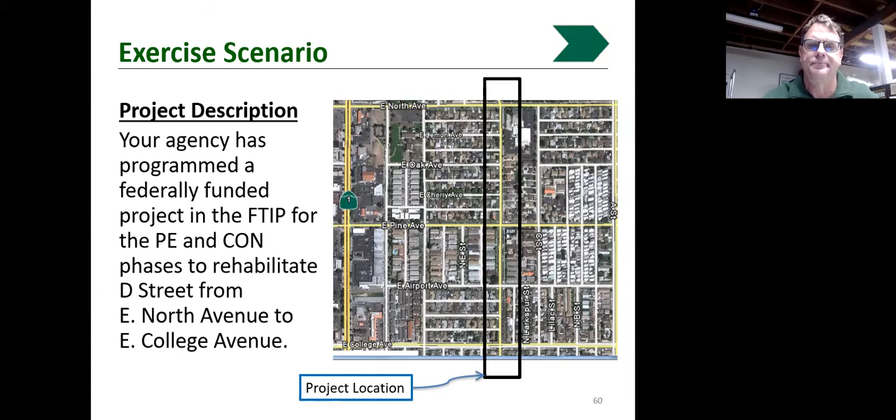So in terms of the RFA package, we're doing PE. This is what we expect you to deliver to the Caltrans district engineer.

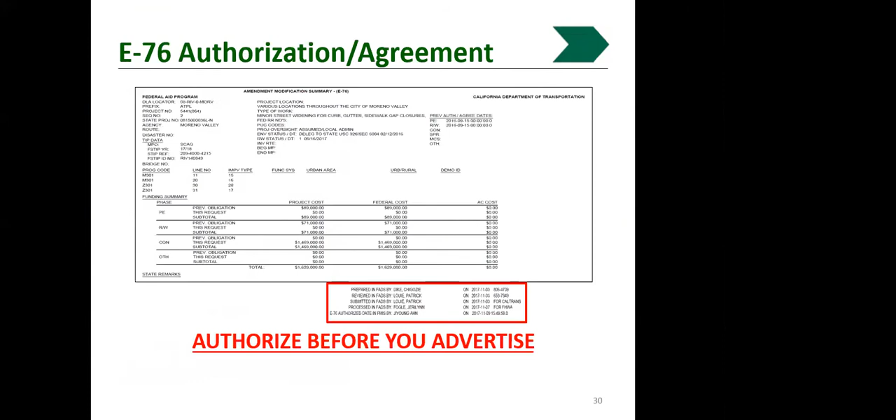Oops, what happened? I'm sorry people, it did it again. When you have a keyboard, Peter, I have a trick for this. If you right click on the PowerPoint, you can select the slide you'd like to jump to. Thank you. Yeah, it's just, I got crazy fingers and the keys I want to hit are right next to each other, and I just hit one too high.

Okay, so assuming this federally funded road rehab project is programmed in the FTIP for both PE and construction, you're going to provide documents for the PE, providing the following documents in the package.

You have a field review, FTIP, and a classification map. We're going to complete the request for authorization, the LAPM 3A, in this case as a group, but basically led by me. I will pause.

So for the field review form, standard information, one of the key things is ensuring there's consistency. I emphasize this, consistency in terms of the project description and limits, that these meet everything in terms of where it's defined in the FTIP versus the field review. Because our requirement prior to the field review is the PES, the environmental documentation you fill out before, and that document is required to have the FTIP description in it. So the FTIP description should carry forward through all this documentation to ensure we are authorizing what was programmed. So I emphasize consistency between these documents regarding this work.

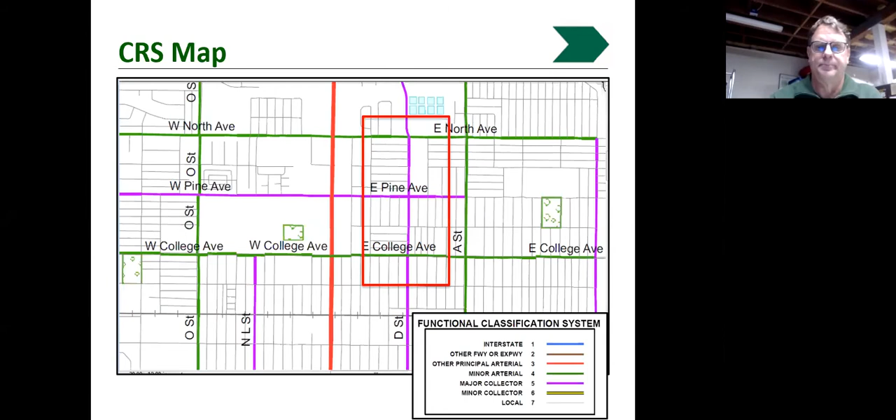And so it goes to major collector. Is it on the federal aid system? Obviously, the field review defines it as being on the federal aid system. And some areas get involved with, is this a PoDI? Well, no, it's not. The Caltrans encroachment - is this any way, shape, or form touching a state facility? No. And is it state only funded? No, we're using federal funds.

So cost estimate breakdown for this project - these are things you would develop to have an estimate. In this case, you're showing that you're going to be using federal funds for both environmental, design, and construction engineering. You have an estimate. These things are updated periodically. Early in the process, these are going to be really rough numbers. They're not going to be exact, but they should help tie into what's programmed in the FTIP. That's one of the key things here - these numbers should be very close to what's programmed in the FTIP.

So project administration - the agency is going to be doing the design and environmental themselves. Construction engineering, yes. Construction, of course, is going to be contracted out, so it's consultant - that's what it really means. And then, of course, the maintenance of the project is the agency's.

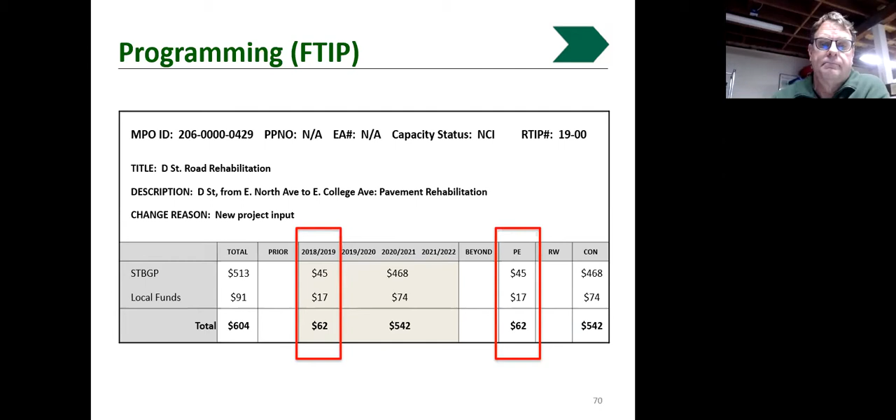So we're going to now start going through the process of filling out this form. The date is just a pull-down calendar. Federal project number - that will be a number supplied to you from the Caltrans district area engineer, the DLA, so they'll give you a federal project number. The alpha prefix ties in with the funding code. We mentioned earlier that we have STP funds on this, a block grant, so we get an STPL prefix.

The first 4-digit number is what we call a loco. Every agency has a loco - it's just unique for your agency. The parens number, in this case the 86, is just a numerical sequence of projects that have been developed for that agency. We have a system called LP2000, and that's how our numbers are generated. So if we came through with the next project, it would generate an 87. That's all, but every project has a unique federal project number.

So the agency, city or county, put your information. Caltrans district, it's a pull-down menu - in this case, we chose District 5. And a congressional district - when you select Caltrans District 5, the congressional districts are restricted to congressional districts within that Caltrans district. And the CRS maps can help you identify exactly which congressional district.

And then what we do is we add 12 months to those dates to allow for unforeseen conditions that happen - you know, there's a delay or something like that that occurs.

Project end date for this project - these are kind of estimates. In this case, we had a construction federal fiscal year that was 2 years out. We estimated, granted these are a little bit off of today's dates, but we estimated the advertisement date was going to be March of 2021. So the project end date would be 3/11/22. There's a pull-down menu - you put in 3/11, and it automatically adds the 12 months.

I'm going to pause for a moment and check chat to see if there's any questions. I don't see any questions. Okay, so...

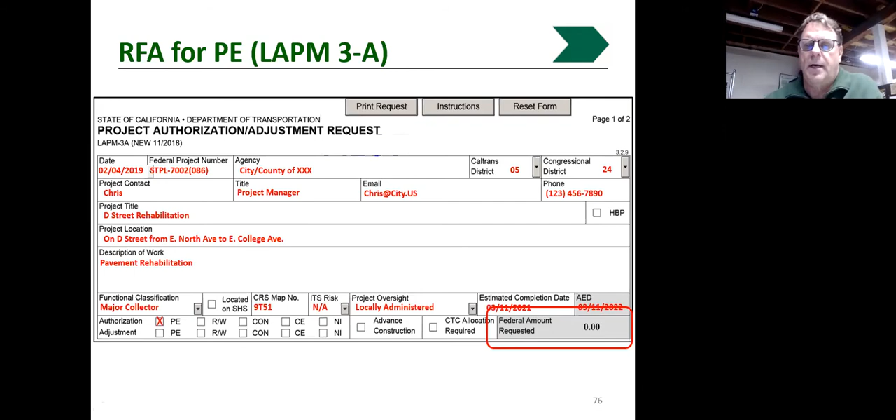Let's see what's happening here. So, okay, the end date - and then we're going to go into what's the federal fund amount to be requested. This will be generated automatically through the funding section.

And one of the first things to ask for is pro rata or lump sum. FHWA requires a reimbursement type to be established at the time of authorization - pro rata or lump sum. Pro rata dictates that whatever reimbursement ratio you have, that reimbursement ratio will be retained. Lump sum basically says if you've got X number of dollars, we're going to hold that federal dollar amount, and whether the reimbursement rate goes up or down, we'll hold that reimbursement amount. It cannot exceed the federal reimbursement share.

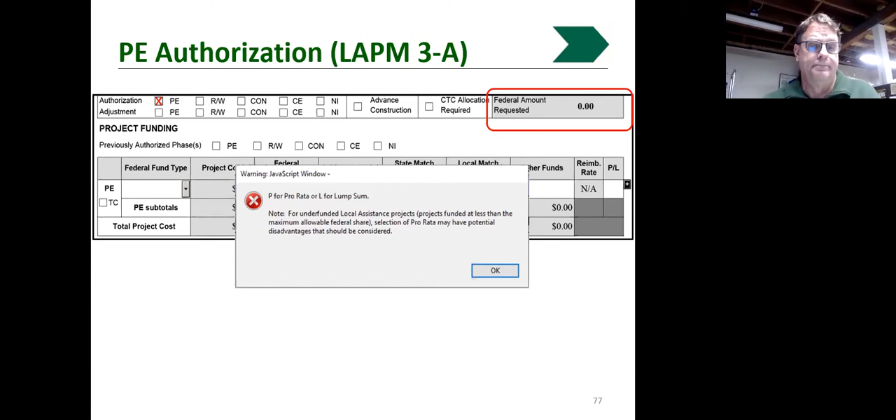But here's kind of the rule of thumb: if you are fully funded, meaning that you are at the maximum federal reimbursement rate - in this case 88.53% - pro rata is your preferred choice. If you're underfunded, meaning your reimbursement rate is less than the federal maximum, in this case say you're down at 75%, lump sum is your preferred choice.

And I'll explain here why. If you're at pro rata in 88.53%, if the cost of the project goes up and you're able to add funds to it, you'll retain that 88.53%.

Costs go down, same thing. You will always be reimbursed the maximum amount of funds. If you are underfunded and the program is lump sum, say at 75%, if costs go up, you're going to have to cover those costs with your own dollar no matter what. But if the costs go down, you have savings. The initial dollar of savings will be 100% local funds until the costs go down to a point where the total federal funds hit the 88.53%, the maximum federal reimbursement, and then it would be held at that.

So if you're underfunded and you chose pro rata, say at 75%, costs go down, guess what? For every dollar saved, you only get 25 cents, federal gets 75%. But if you're lump sum, that initial dollar of savings would be 100% local funds. I hope that helps in choosing which of these you do.

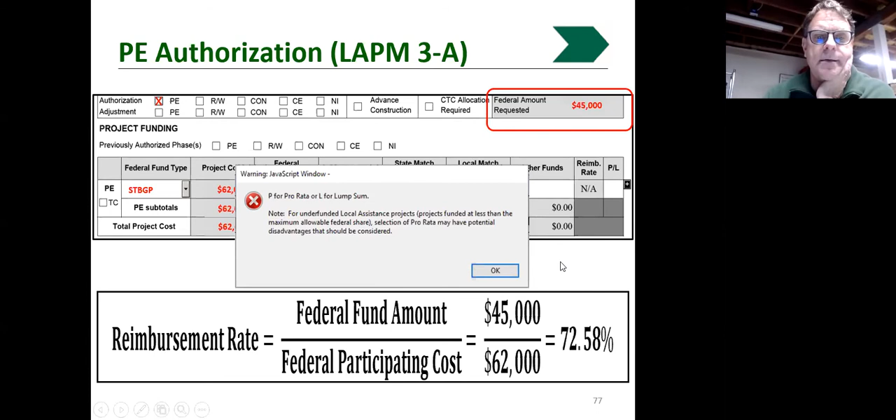So, things got a little bit out of hand here. Project funding, we're doing the PE phase. Why is that not going away? Something got an error here in the PowerPoint. I'm sorry, that pro rata should have gone away. So you've got your block grant funds. Geez, I'm sorry, I can't get rid of that pro rata lump sum there because I missed that, some error in the PowerPoint.

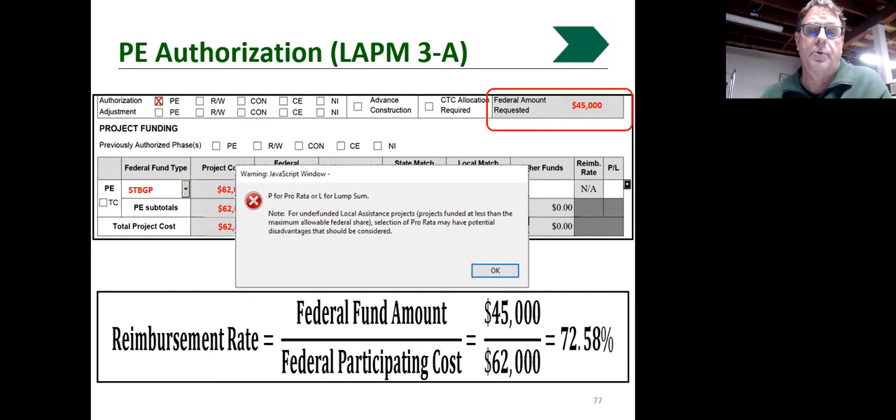I'm sorry, you can't see the funding, but it shows funding of 45,000. Federal total cost was 62,000. In this case, this project had a 72.58% reimbursement rate. That would be automatically calculated.

You can see the lump sum was chosen. Toll credits, no, and there, okay, there's that pro rata gone now. I'm sorry. So you'll see that 62,000 was the total cost. Federal participating 100%, 62,000. 45,000 of federal funds, 17,000 of local funds.

And like I said, to give you a reimbursement, since it's under the maximum reimbursement ratio for STP of 88.53%, it was wisely chosen to be lump sum. And you see that this federal amount requested, 45,000, is automatically populated based off of the project funding.

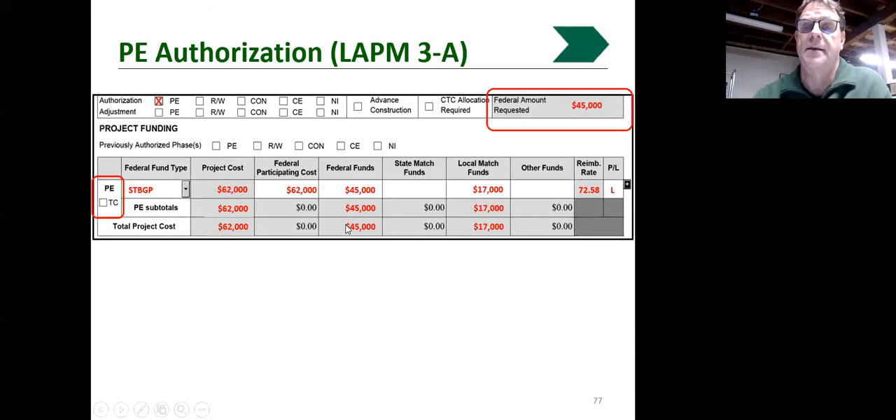So once this form is filled out, you'll see that on the second page of this form, it gives you the required supporting documentation that you need to submit with your package. In this case, it has the FTIP. If you have CMAQ, you must submit CMAQ benefit calculations. In some cases, there are a few MPOs out there where the CMAQ information is actually included on the FTIP page. If not, it's a separate document.

Again, if by any chance you're using consultants that you're not going through the normal consultant selection process, you may have to submit a PIF. And of course, your DBE information needs to be updated. It may be your first project of the federal fiscal year, and you'll need to make sure your DBE is submitted for that first project. Projects after that would already be accepted.

Responsible charge certification is required, certifying that we have a full-time employee in charge. Oops, went too fast. So you'll have to make sure we have a person of contact, and any comments you want to put in the remarks.

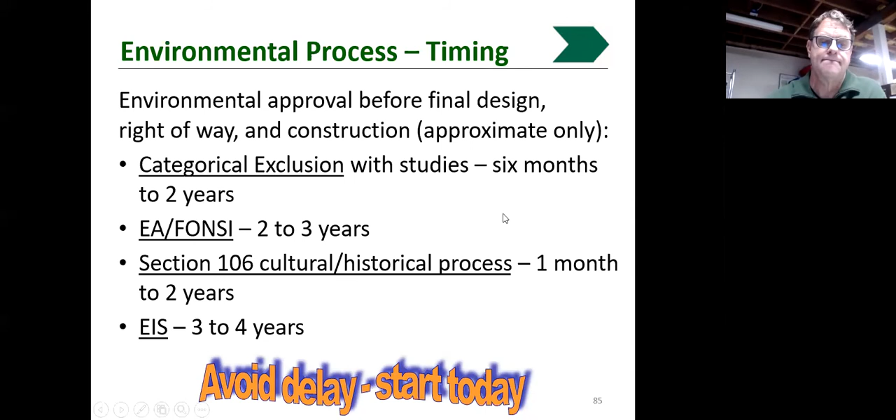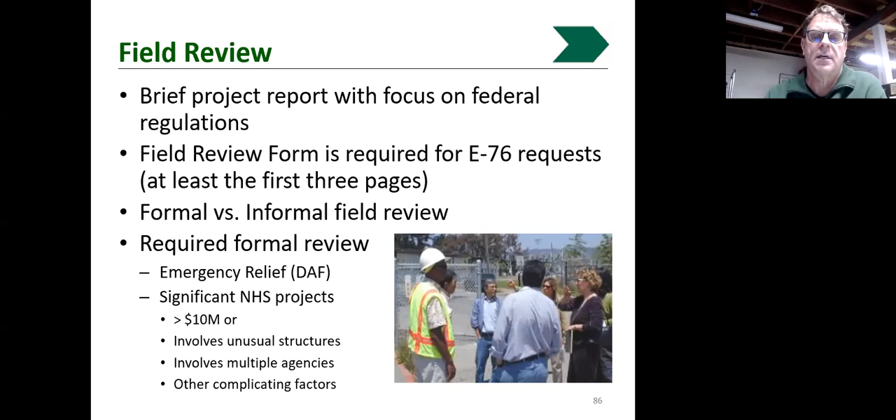So how they're being handled in this day and age, I do not know exactly, but I assume similar to a Zoom process of getting people all in the same room to discuss a particular project. As I mentioned, here's the field review form we went through earlier with our D Street project.

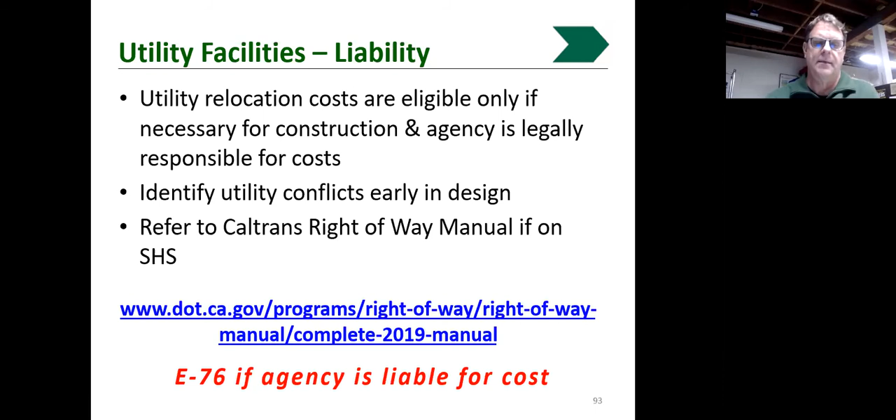So you need to identify any utility conflicts early in the design. This is a case where we refer to the Caltrans right-of-way manual for projects on the state highway system. And then the E76 is processed if the agency is liable for the cost in this, so you can get the right-of-way.

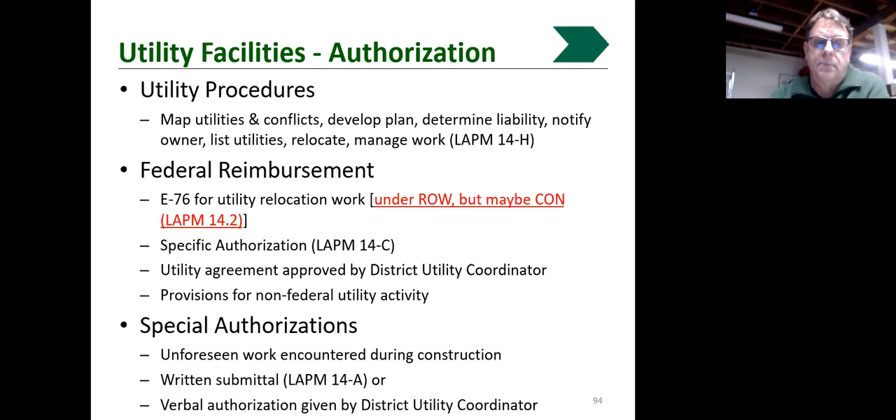Okay, got one more quiz. Nicole, I'm looking at this thing here. I'm willing to call it quits for the day because I don't want to, if I go into the next section, it takes me right up to the construction authorization exercise. I don't want to start tomorrow directly with that exercise. So, we'll go - well, yeah, we'll do that one section. We'll do it also. So I changed my mind.

Okay, well, you're leading the ship. Yeah, well, I'm just looking at the clock here, and normally we take a break, and I think what I'll do is just finish this quiz, go through this quiz and the next. People are answering: what steps must be accomplished before the right-of-way phase can be? People are slowly answering.

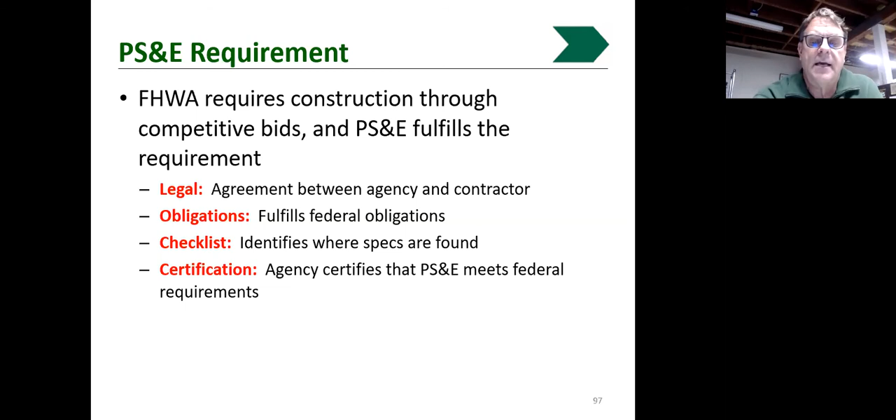Plans, specifications and estimate, PS&E. FHWA requires construction through competitive bids, and PS&E fulfills that requirement. They are a legal contract, agreement between the agency and the contractor. It fulfills all the federal obligations. We have a PS&E checklist, which identifies where specs can be found, ensuring that all specs are included. And certification, the agency certifies that the PS&E meets all federal requirements.

So we have the PS&E certification, LAPM 12-D. The local agency certifies that the PS&E package complies with applicable federal, state, and local laws, including design standards, geometric design exceptions, standard plans, special provisions, federal form 1273 provisions, federal wage rates, non-collusion. Federal form 1273 is highlighted because that's what we call the federal boilerplate language.

It is absolutely required that that be included in both the construction contract and any subcontract involved with the project. FHWA, I think it's been at least 7-8 years ago, did an audit, and they picked like 50 projects, and they found a perfect 50-0 that the federal form was not in there. It was referenced as a supplement to go look at this, and that was not acceptable. It has to be physically incorporated such that the staples through the contract document go through the form 1273 provisions.

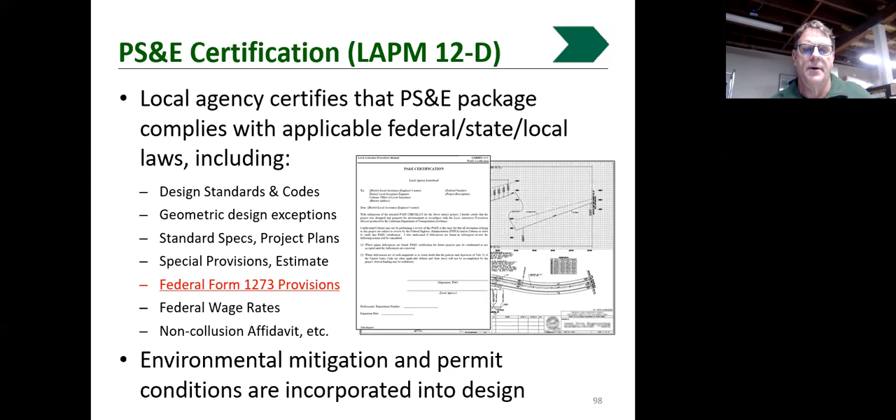And then of course the PS&E must meet all federal environmental mitigation permit conditions that are incorporated into design. Standard plans and specifications - state standards can be used on local streets, required on state highways. For local projects, state standards can be used. We refer to the Green Book, or locally approved standards can be used on local projects.

Pausing for a moment for chat. Somebody posted, is the 14C used even if utilities are funded in construction? The answer to that is yes, still part of the investigation and right-of-way process. Yes, the 14C is still used.

Note to local agencies, make sure you have all non-standard language in utility agreements provided before. Okay, somebody just put in a comment there. Sorry, I took a step back.

So for standards, if you're dealing with projects on the national highway system, locally approved standards are not acceptable. You must use the AASHTO standards, the Green Book, or state standards.

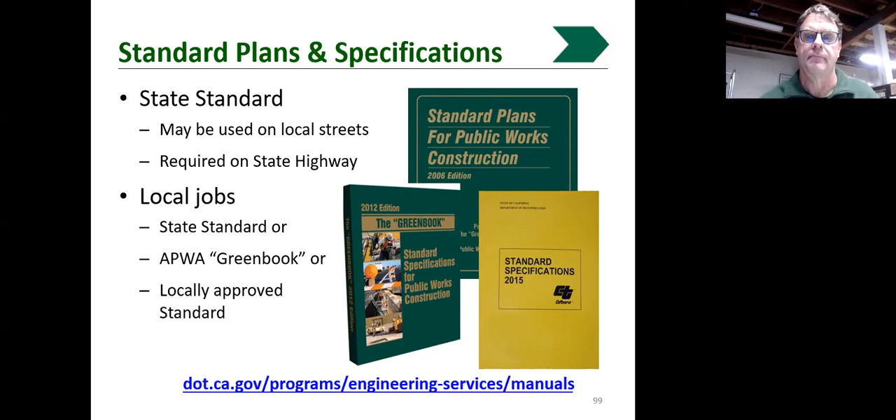Engineer's estimate - you must identify both participating and non-participating work, broken down in contract items. Agency furnished materials - I've mentioned here that the PIF is required. If the agency furnished materials were acquired following federal procedures, then that'll be acceptable. Identify your contingencies.

Break down your construction engineering force account, same type of thing. You need to do a PIF. It's anticipated that everything is done by contract, but if it's being done by your own force account work, you have to justify that it's in the best interest of the public. And proprietary sole source items, same thing, need a PIF. I mentioned in the handouts, page 31 through 33, that's the PIF.

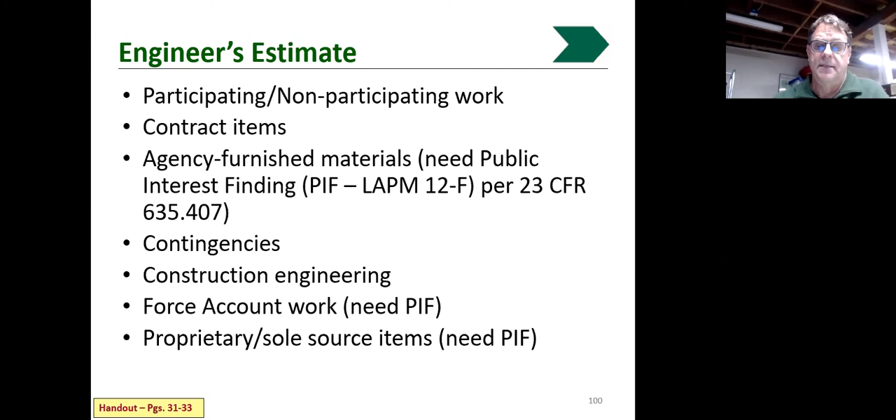Final design construction methods. Final design, of course, NEPA approval date must be prior to final design, beginning of final design, at least one day, or a project could be ineligible for federal funds. You do not want any way, shape, or form to have design dictate the environmental.

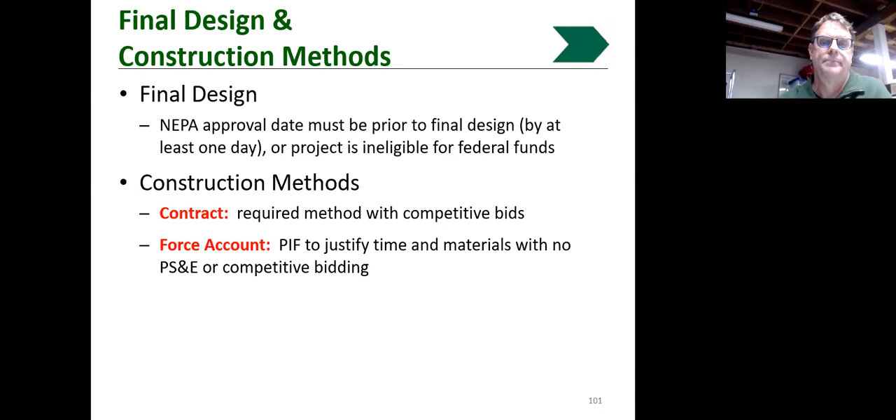Construction methods - typically the preferred method is by contract, or it can be done by force account, but it has to be justified. The PS&E package for construction needs to be submitted at the same time, and includes the PS&E checklist, LAPM 12D, the PS&E documents, and of course the engineer's cost estimate.